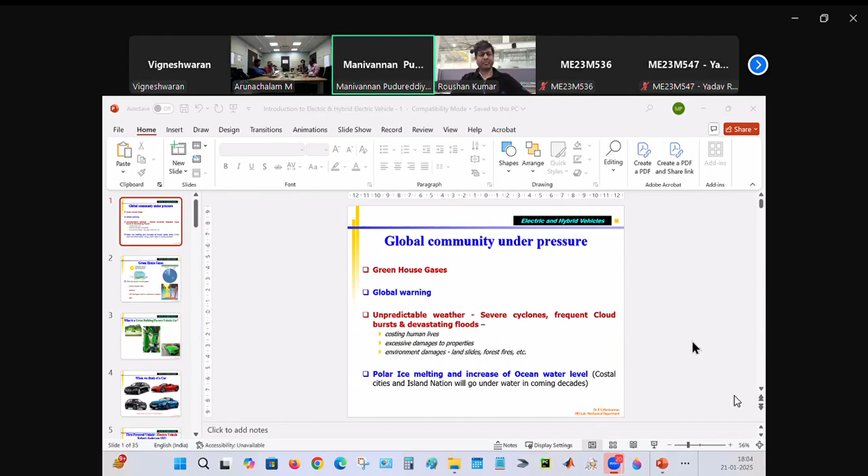I think you can see this is what we started yesterday, just 2 slides only. We are talking generally about what is the issue with global warming, greenhouse gases, which we discussed yesterday.

So already I told you that greenhouse gas is a major issue, which is actually destroying the Earth's atmosphere, which in turn, if you don't control greenhouse gas emissions, the average temperature may increase, summer will become hot, all those things.

Because of that, people, animals, plants can go extinct once for all. That can happen, like dinosaurs, all those things happened. Same thing can happen, but this is a slow process.

We know that dinosaur extinction is only argument or partial proof. Some meteorite, a big one, came and hit the earth near Mexico in the Atlantic Ocean, and it created so much dust that it covered the entire Earth's atmosphere so that sunlight could not reach the Earth's surface.

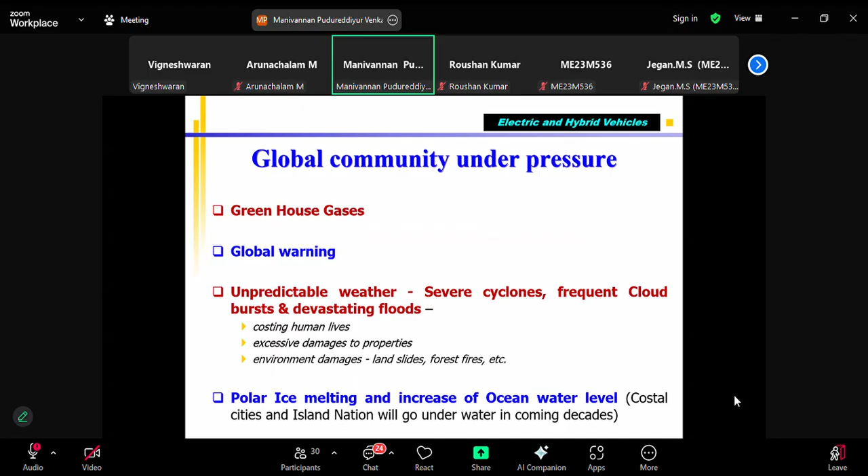They say one of the reasons for dinosaur extinction 65 million years ago is from an asteroid hitting, right? A big asteroid measuring a few kilometers in size. Like that, the Ice Age came and did like that. And they say now humans are creating their own destruction. That is why so many meetings and new technologies are coming.

Okay, now yesterday I explained about greenhouse gas. I know that primarily our interest is reducing the carbon dioxide production or emission from the tailpipe, which was supposed to be an inert gas, right? It was called an inert gas.

So that's why, as I told you many times, we drink soda, which is water plus some minerals, some sweetener, plus carbon dioxide gas. It helps you feel good, helps in digestion, correct? We drink soda many times, but that gas may be inert, but it is a greenhouse gas, which is slowly increasing average temperature. That should be avoided.

Apart from other gases, I know that fridges, AC, all those things have CFC gases, which is already banned. Alternate gases are used in the refrigerants, all those things.

Of course, NOx production is also coming from the engines, combustion of hydrocarbon fuel. But please know the fuel doesn't contain nitrogen. But if combustion temperature becomes above 1000 degrees and the oxygen in the air, which is inside the combustion along with the nitrogen inert gas, they can combine, correct?

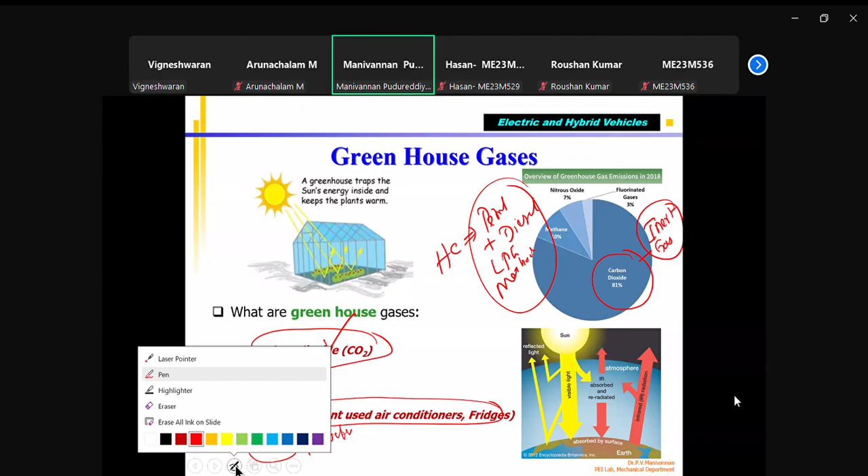Scientists came to know that carbon dioxide is a greenhouse gas only 30-40 years before. Before that, for the last 100 years, throughout the world, whether in education universities like IIT, MIT, Stanford, Japan, the IC engine lab's main job was to improve combustion efficiency first, then reduce toxic gases like NOx, CO, and HC from diesel or petrol engines using catalytic converters or adjusting timing, so perfect combustion happens.

If perfect combustion happens, these three toxic gases and particulate matter can be reduced. Research has gone on for at least 80 years, but only some 30 to 40 years before, scientists and automobile company researchers found that CO2 is a greenhouse gas and global warming started. That means you need to reduce the production of carbon dioxide. But we know that if I do combustion of petrol or diesel, HC plus O2 automatically gives CO2 plus H2O - this is perfect combustion. Even with perfect combustion, CO, HC, NOx is reduced, including PM in diesel and petrol.

This is reduced by using catalytic converter, SCR, all those things. But CO2 cannot be reduced this way, because you are supplying some mass of fuel with some mass of oxygen from the air. So automatically an equivalent amount of CO2 and H2O will come, because input mass equals output mass, except some fraction converted to energy or power. So that means whatever you do...

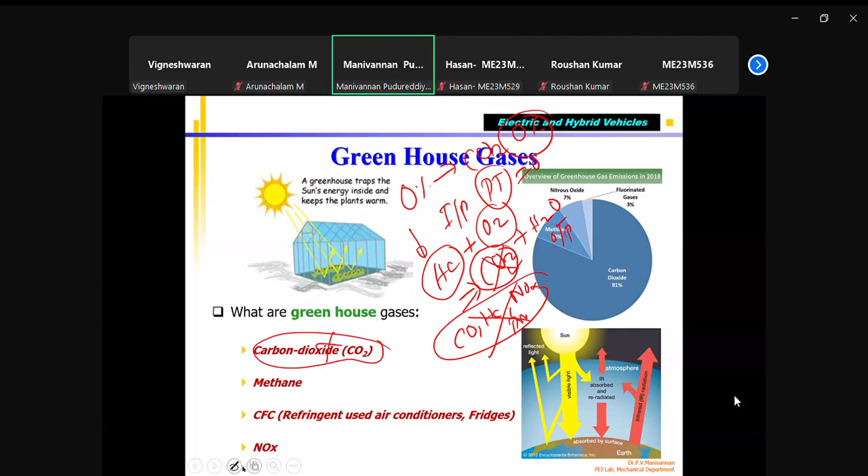So in an IC engine, it is impossible to stop using fuel - without fuel, the engine won't work. Suddenly, as I told you yesterday, without IC engines you cannot do anything, whether in industry, transportation, airplanes, ships - wherever you are doing combustion, engines are there, whether diesel, petrol, LPG based engines, gas fuel, or jet engines - you are going to burn hydrocarbon fuel.

So the only way to reduce the amount of CO2 produced, if you still want to use the IC engine, is making the engine more efficient. With less fuel burned, less CO2 will come, but you still get sufficient torque and power so your vehicle can transport goods and passengers. So for the last 30 years, the main group of engineer researchers and automobile companies are working on increasing the efficiency of the IC engine or jet engine. We know that without that there's no possibility of doing any work. So they're doing research, trying to improve the thermal efficiency.

Thermal efficiency has a limitation. Based on thermodynamic law, only a certain percent of fuel burned gets converted into mechanical energy. If I burn some amount of fuel and get 100 joules of heat energy, the entire energy cannot be converted into mechanical torque, power, or vehicle speed. So that thermal efficiency - around 40% theoretical efficiency for the Otto cycle, diesel cycle, whatever cycle - finally there's a limit.

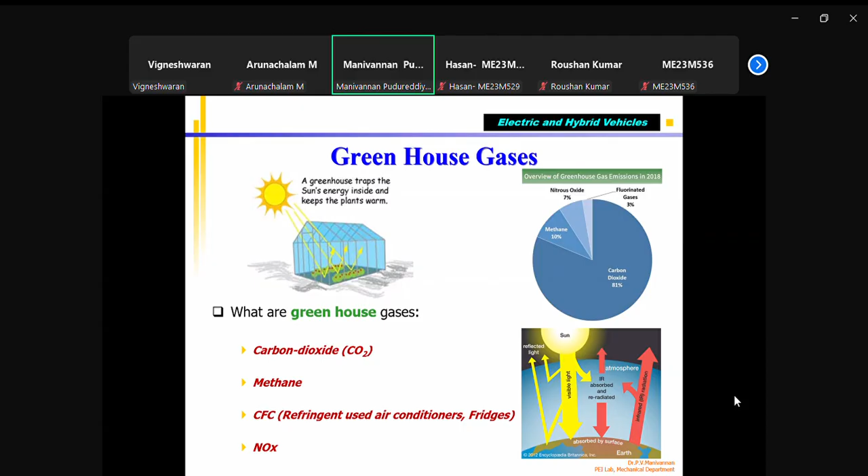But in case of electric motor, the input energy is electrical power. I give so many volts, so much current flows, power equals V into I. If you integrate the power consumed by the electric motor over time, you get energy. So if I give say 100 watts of electrical energy, you can get close to 90% of the mechanical energy. In an electric motor, the energy conversion is close to 90% because there is no heat loss, the machine is working by electromagnetic induction. Torque is produced by electromagnetism. So present generation motors, brushless DC motors and all, are giving up to 95% efficiency.

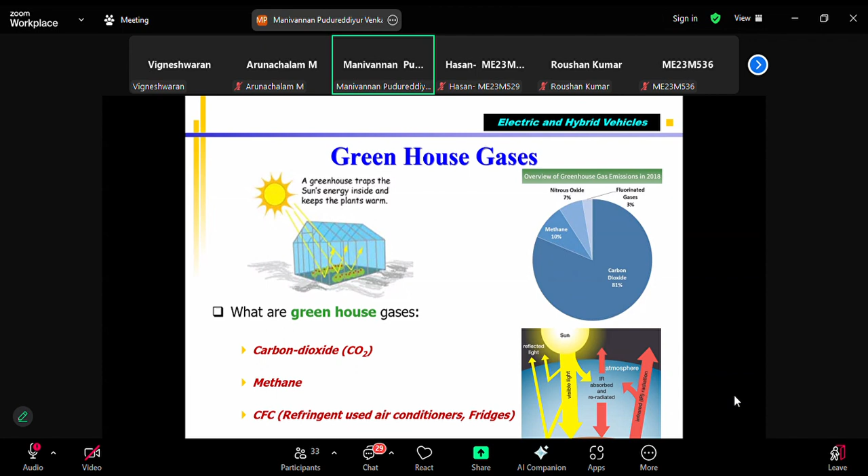So if you can go for using electric motor to generate mechanical torque, power, or energy to do any task, whether to drive your motorcycle, car, truck, bus, ship, or aeroplane, jet - instead of jet engine, use electric motor for driving propellers, whatever it may be - then the efficiency is very high. And apart from that, CO2 is zero because you are using electrical energy. Input is current and voltage.

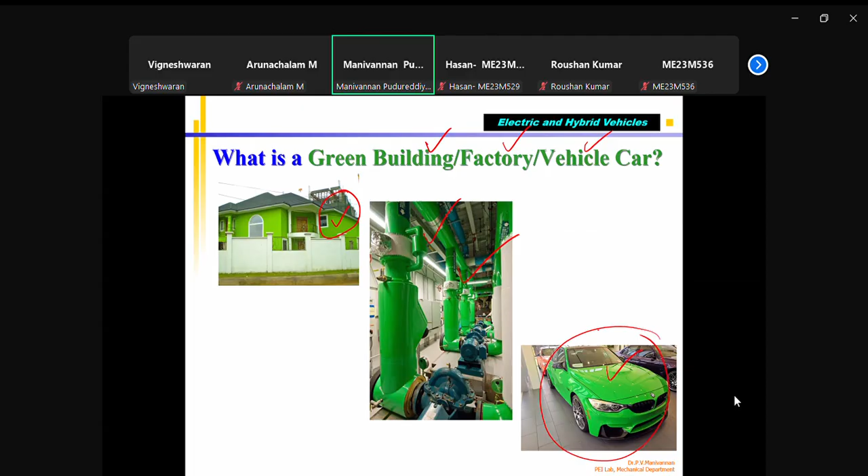Generally when we talk about automobiles, our interest today - the whole lecture, the whole program - is MTech in automobile technology, and the course is about hybrid vehicles only. We are not talking about factories, houses, green buildings, or green factories. Our interest is talking about green cars. But a green car cannot be achieved overnight, that's why we have different steps.

So these cars cannot be considered green cars. If you drive this car with maximum fuel efficiency, even if it gives 100 kilometers per liter, you are still burning 1 liter of petrol or diesel, and you automatically produce CO2. You are adding it into the atmosphere, so the atmospheric temperature increases - this is global warming, the greenhouse effect, and all those things. So you cannot avoid it.

These petrol cars are only around 120 years old. All petrol and diesel cars came after the invention of the petrol engine by Otto and the diesel engine by Rudolf Diesel - before that there were no IC engines. All cars are powered by this only. Jet engines are generally not used for buses, trucks, or cars, so we are not going to talk about that. We are talking about internal combustion IC engines only.

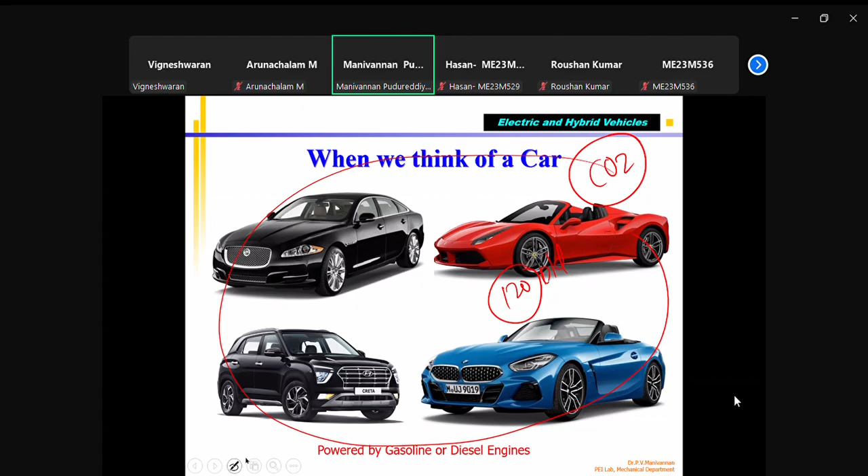So these cars, even now, majority, at least 90% of the automobiles are IC engine based. As on today, at least 5 to 10% we are trying to get hybrid, electric, all those things. But we need to convert the remaining 90% also into pure electric, so that the carbon dioxide production from IC engines is removed from vehicles. Then CO2 production is stopped, greenhouse gas is reduced, and we can protect our environment. But you cannot do it overnight.

We need vehicles for transporting people, transporting goods. Without that, society cannot live. But as I told you, the engine was invented only 120 or 100 years before. Before that, for thousands of years, people were transporting goods or people from one location to another using animals like bulls, horses, donkeys, mules. That was the primary transportation some 5,000 years before.

After that, they invented chariots and also bullock carts, driven by bulls or cows or other animals, and horse-driven carts. Chariots were used for transporting people in a faster way, and also for military purposes. So chariots were part of the military, like horses, chariots, elephants, and foot soldiers.

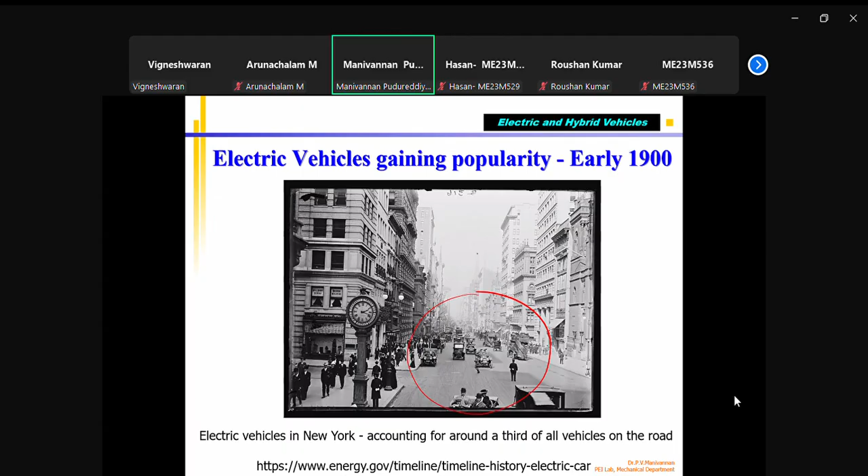Then the hybrid car came. Now we talk about hybrid cars as if it's a new innovation, but please understand all these things were tried long before, 100 years, 50 to 70 years before. Porsche, one of the leading sports car manufacturers in Europe, developed a hybrid car which has an electric motor with an engine. Then the Ford T model. All these things were happening in the 1900s, 1920s, 1950s.

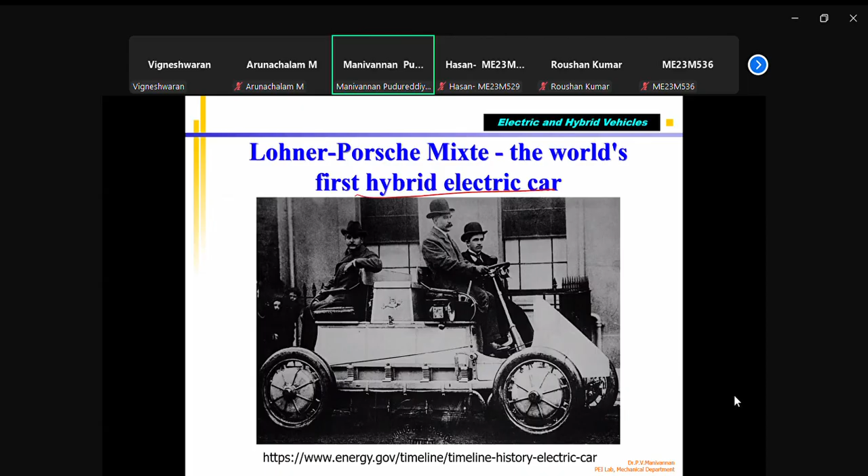But the invention of the petrol and diesel engine, and also extracting crude oil from below the earth, maybe 1 or 2 kilometers down, drilling and getting the crude oil, and then extracting diesel and petrol from it, was very tedious. That time technology was not available, and people did not know crude oil was there below the earth's surface.

They first discovered crude oil, if I am correct, in Pennsylvania, USA, around 150 to 200 years before. It was oozing out like in a desert or forest, a thick black color oil. People thought something strange, then found it was combustible. Crude oil is combustible. Then, of course, Iraq also found crude oil around 150 years ago, since Iraq was under British rule like India.

From that, they developed cracking technology. The petrochemical industry came slowly, along with the production of diesel and drilling, and they found many places in the Middle East, in the US, Russia, and many places in India too, like Assam, we are finding now. So the production of petrol and crude oil, and getting petrol and diesel from it, all came from this.

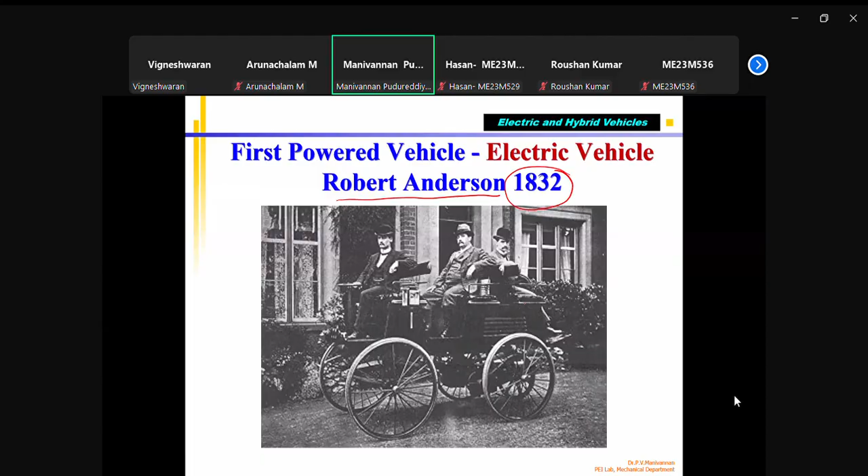So the engine was also invented. The electric vehicle, which started in 1832, became petrol engine based, like the Model T. I'm telling you there were more than 20, 30 companies. Europe had Mercedes-Benz, Citroen — these companies are 100 years old — Fiat, all these companies started in Europe.

Similarly in the US, Ford started the very famous Model T. It was a gasoline engine, very popular from 1908 to 1912. Of course, even now, if you have one, you can sell it for a huge amount — a working car. So this is what I call the penetration of the IC engine inside the automobile.

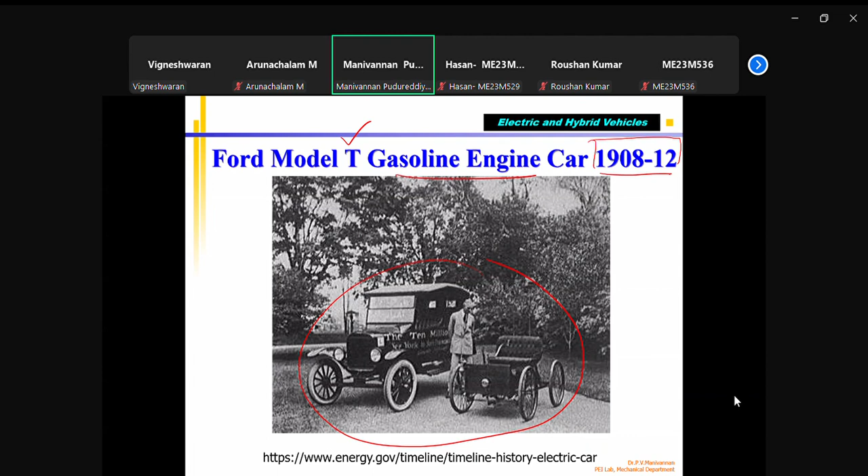The original automobile was an electric vehicle that became IC engine based. Of course, here I'm talking about the 1900s, and then 1970 or 1971, NASA — we know that Apollo went on the Apollo missions.

Neil Armstrong, along with one more astronaut, landed on the moon. They walked on it, correct? But first, the Apollo missions started, I think, from 1 to 17. Apollo 1, 2, 3, 4, like that came. In between, something happened. Apollo 11 was the first one to land on the moon, with Armstrong. Apollo 17 was the last one, if I'm correct. Within 1969, I think, in July, Armstrong landed.

Then subsequently, over another 2 years, 7 more missions went up to Apollo 17. One mission failed, if I'm correct, Apollo 13. They went near the moon but could not land. There was a big accident, but they safely returned. That was Apollo 13. But otherwise, each time there were 2 people.

In one mission, they took a lunar rover because they wanted to travel, since you cannot walk on the moon for long due to limited time. In a short duration, if you want to survey and look for material, you need to move quickly, so you need a vehicle. The first lunar rover was developed by NASA. It landed along with the astronauts, and you can see there are 2 seats. They sat and traveled around 22 kilometers.

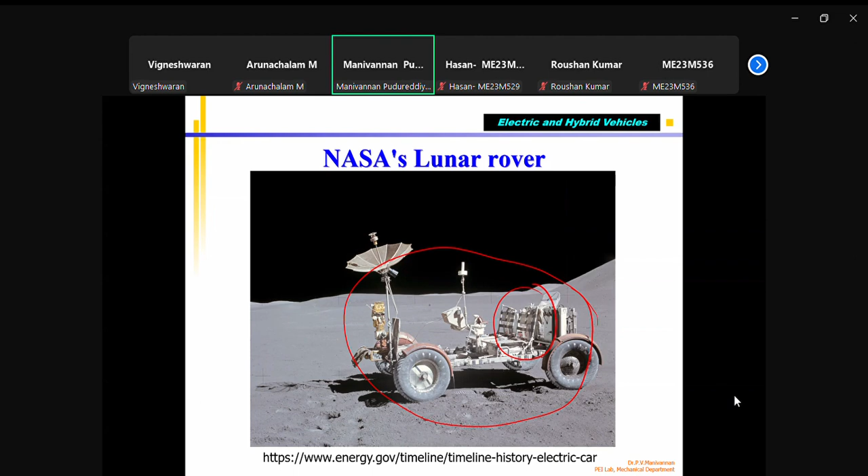Of course, automobile companies also did not keep quiet. General Motors, GM, produced an electric car in 1973. You can see this car, a small car, operated with a lead acid battery. This is charging, you can see, but they had very limited range, using lead acid battery. That was the battery available; lithium ion battery was not available in the 1970s. Lithium ion came only some 20 years ago. Even the concept existed, but it was not commercially available.

It had limited performance, and we will talk about that tomorrow, the limitations of electric vehicles. The range: the battery could travel the vehicle some 20-30 kilometers after starting, then the battery discharges, and you have to charge the lead acid battery for 10 hours. So you would travel another 20-30 kilometers, then stop. The weight to power density of the battery was very bad, something like 10%, 12%. Because of all these things, GM said electric vehicles would not come, that it was not feasible compared to IC engine based vehicles. That's what they were talking about.

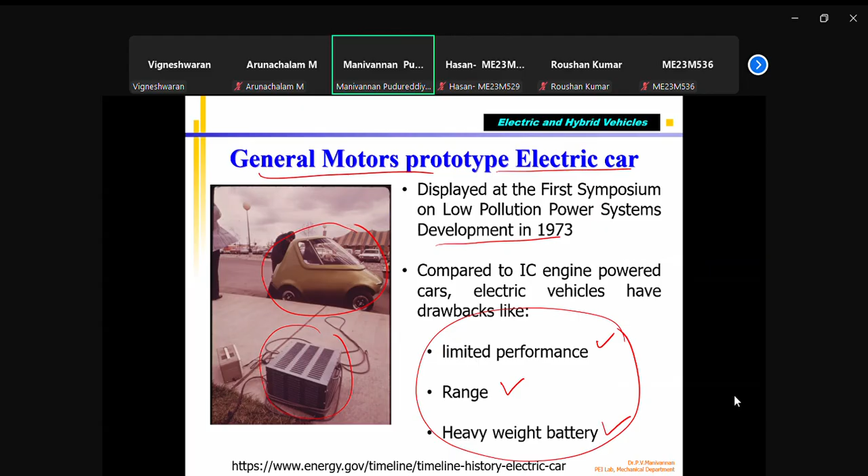So even though GM tried, other companies also tried. I'm giving one example, General Motors in 1973, they tried like that. Other companies tried, then they abandoned it. But that's not our interest. Since all this happened in the 1970s, one way forward is to improve efficiency. We want to reduce CO2 production, which means you have to improve the efficiency of the engine.

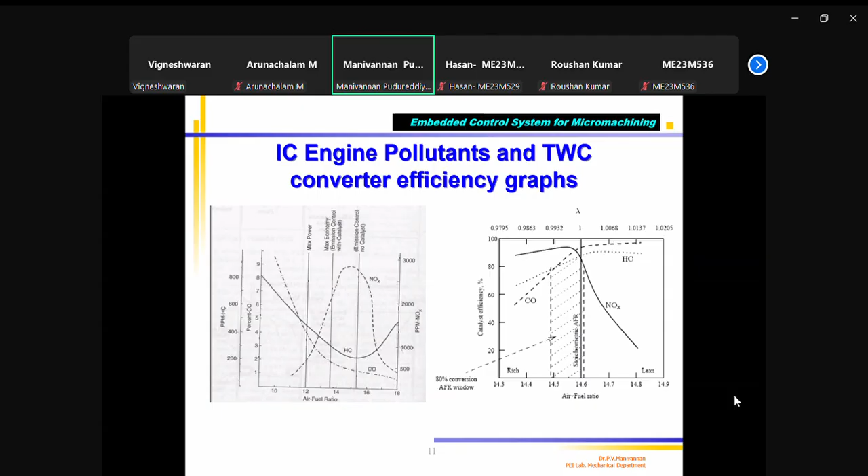Apart from reducing emissions, we already talked about this in the previous class, when I discussed IC engines for the introduction to autonomous vehicles. But just to quickly go through it, we try to develop new technologies to reduce fuel consumption. Reducing fuel consumption means the amount of CO2 produced is also reduced. So lesser the fuel, lesser the CO2.

But you want to get maximum torque and maximum power. We know that in a petrol engine, the torque produced by the engine is directly proportional to the air-fuel ratio and spark timing. The best thermal efficiency is obtained in a petrol engine when the air-fuel ratio is around stoichiometric, slightly leaner, not exactly at one, around one by 15 or so, where thermal efficiency is maximum.

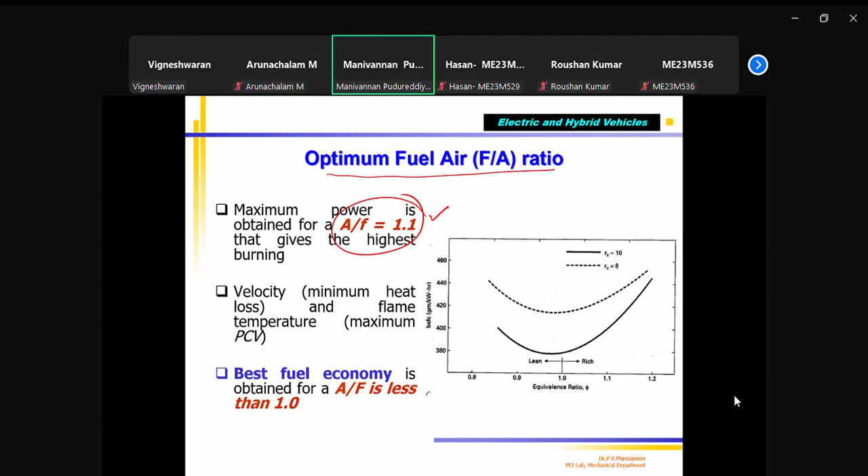This graph shows that. The next thing is, if you talk about an SI engine or petrol engine, the torque T is proportional to AFR and spark timing. Spark timing refers to when you give the start of combustion, or when you give the spark, measured from TDC as advance or retard. Depending on engine speed, you change when the spark is given.

10 degree before TDC, 20 degree, 30 degree, or 35 degree, you will vary. So that means as a control engineer, the SI engine's torque, speed and power can be controlled by varying the air-fuel ratio and the spark timing. These two, if you vary, the indicated mean effective pressure, or final shaft power, can be controlled. So this is one thing.

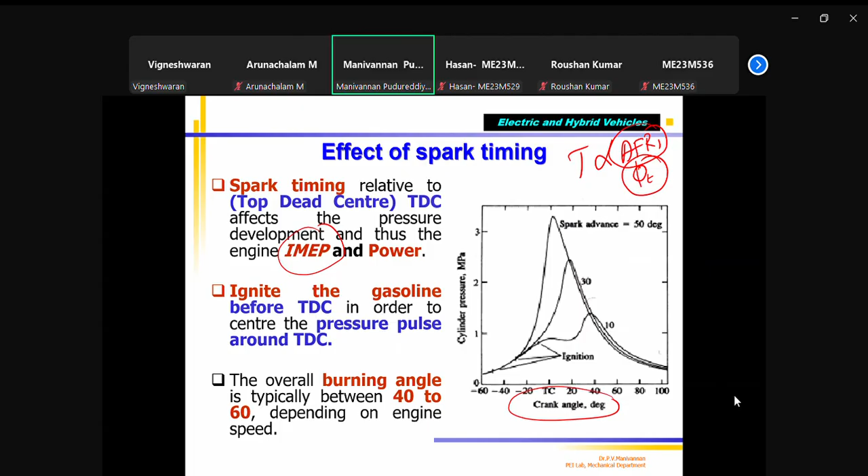So all the research now going on in IC engine labs, universities, and industry is trying to play with these two parameters, air-fuel ratio and spark timing, to ensure the engine produces maximum torque with minimal fuel, so that CO2 emission reduces, apart from reducing CO, HC and NOx. And again, maximum brake thermal efficiency or maximum brake torque also happens only at a particular spark timing in a petrol engine.

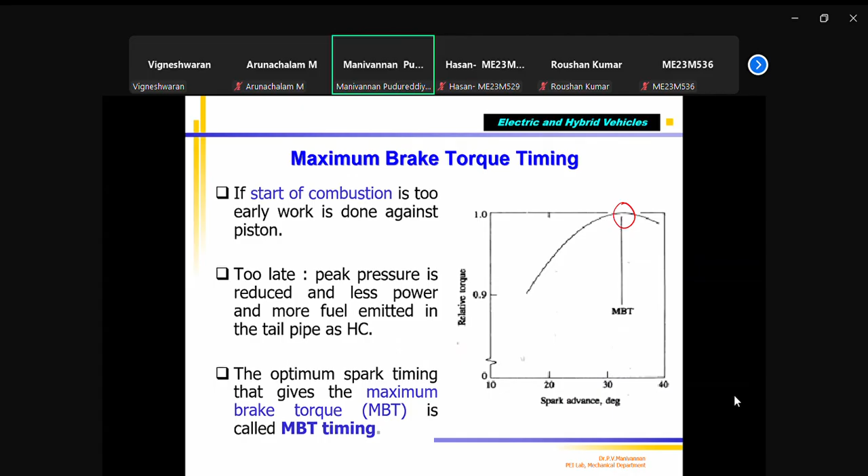So again, this will be electronically controlled - electronic spark timing control, electronic air-fuel ratio control. People have developed different types of fuel injection systems, advanced fuel injection systems. We already know it is better than the carburetor for fuel metering. A carburetor cannot achieve the level of fuel control needed for proper combustion, so CO, HC, NOx and thermal efficiency are all affected. That is possible only with a fuel injection system.

For perfect combustion, the liquid fuel should evaporate and become a gas before or during combustion, so all fuel will be burned. If all fuel is burned, I get maximum torque, and wastage of fuel is reduced, so CO2 emission is reduced.

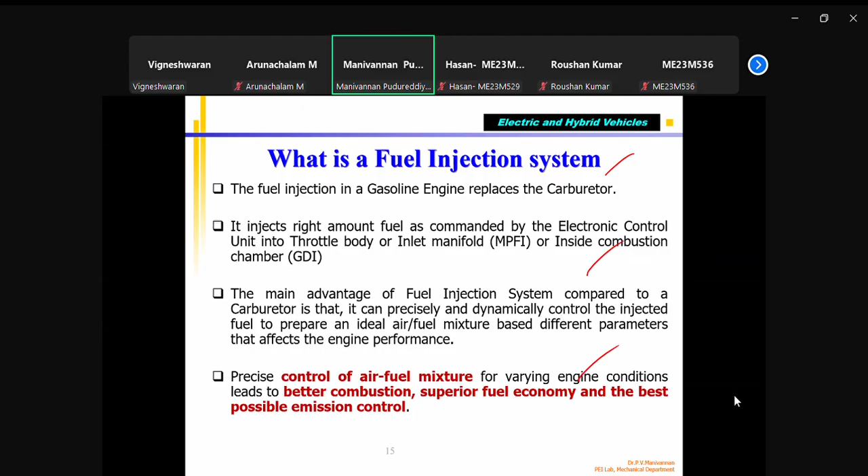So different fuel injection techniques were used in diesel engines and also petrol engines. We know that spraying fuel improves fuel vaporization. If fuel vaporizes, homogeneous air-fuel ratio happens inside the combustion chamber, so the fuel vapor easily mixes with air and gets oxygen molecules close to it. So all the fuel molecules get converted into CO2 and H2O, giving maximum heat, maximum pressure, and maximum thermal efficiency. Vaporization is very important, and that is achieved by using fuel injection instead of carburetor.

Spraying also makes cold start easier. All these things are much better in fuel injection compared to carburetor. Otherwise, you have to put the choke. We know that with motorcycles...

Anytime I had a motorcycle, I drove it for 20-25 years. In winter at IIT, in the early morning December temperature would be 18-20 degrees. I had to go and kick-start my motorcycle because there was no starting motor - 10 times, 20 times, sometimes my leg would pain. I'd put the choke, still it wouldn't start. Sometimes because it's very cold. In Chennai itself it's bad, think about going to Kashmir, North India, cold countries, European countries, US, Japan.

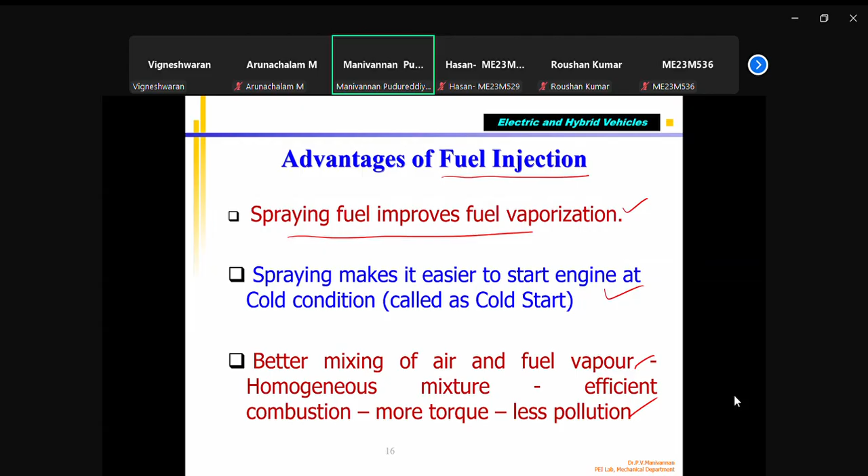It is very difficult in cold weather. So the fuel injection system can automatically adjust the air-fuel ratio without a choke - they call it electronic choke, injecting more fuel. So fuel injection can help in cold start. Better mixing happens because the fuel is already vaporized due to the small droplet size.

So fuel injection did not come overnight - there were 3 stages. Currently we are going to GDI engines, the latest one. First it started with throttle body injection - that means in a multi-cylinder engine, only one injector will be there in the plenum, at the main throttle body. It will inject all the fuel. For example, in a 4-cylinder engine, it will inject the fuel necessary for all 4 cylinders at one location.

When air moves, the air is sucked in and the vapor will mix with it and go to individual cylinders. But the main problem with throttle body, a single point injection in a multi-cylinder engine, is maldistribution of air-fuel ratio.

For example, I have 4 cylinders arranged like this. Piston is going, I inject the fuel at the central body, air is coming in. When I inject, the fuel vapor is here - you can see this area will be rich. So when air enters and the piston goes down, this cylinder will get less fuel vapor and more air. But for the next cylinder, more fuel will come because the fuel vapor is very close. So these 2 cylinders will get more fuel vapor compared to the other 2 cylinders. This is called central body or throttle body injection, which came about 50 years ago. They call this maldistribution of the air-fuel ratio.

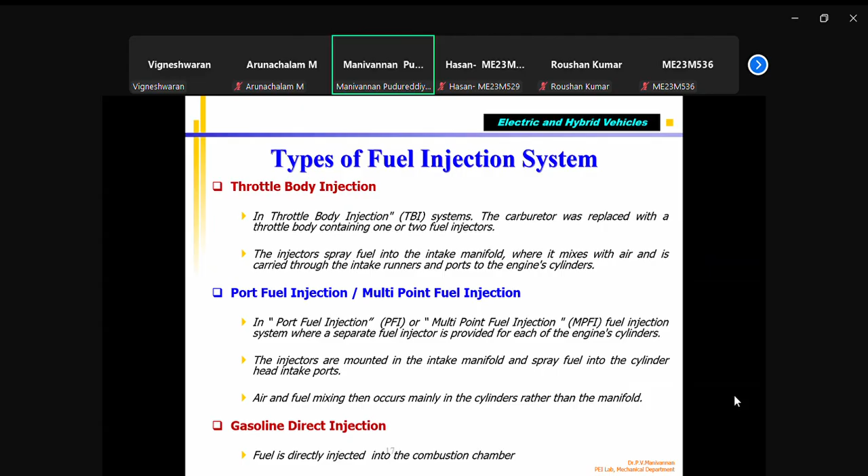These are the advantages of fuel injection systems compared to carburetors. We already discussed this in the previous course, but the whole idea with electric and hybrid vehicles is reducing fuel consumption as much as possible - but we cannot make it zero. If there's no fuel, the engine will not work. Right now, in one step, you cannot go to electric vehicles - there are limitations which we will see in the next class.

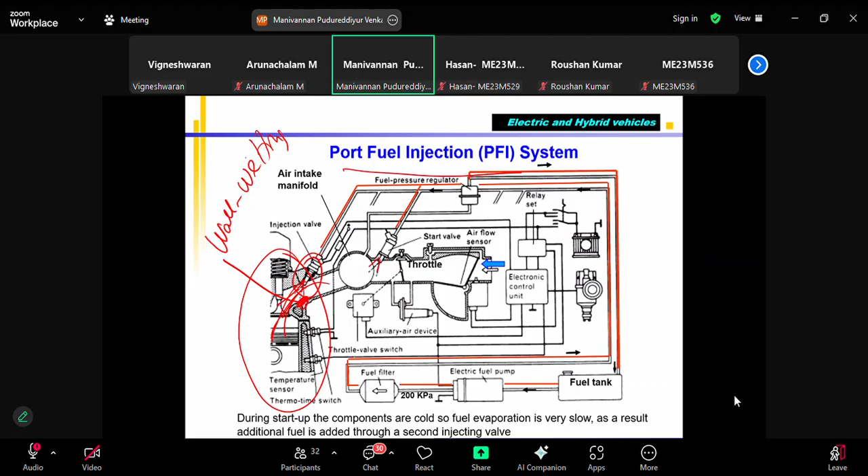So we know that in port fuel injection with a single cylinder, like a motorcycle, there's only one injector. I'm injecting fuel, so some amount of fuel sticks - that is called wall wetting. It is a liquid fuel, it sticks. The majority of fuel goes inside the combustion chamber along with the air, but some remains, so that fuel is wasted. Because the air-fuel ratio is not maintained, CO and HC emissions happen.

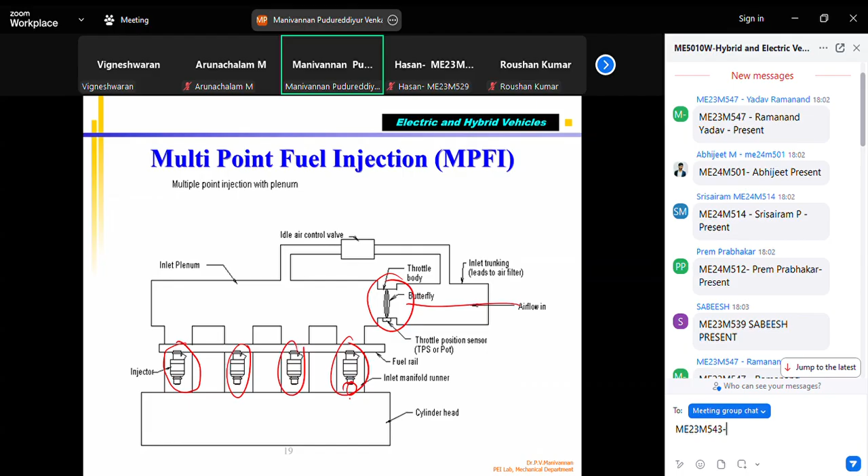With multi-point injection, each cylinder has its own injector - one, second, third, fourth cylinder in a 4-cylinder engine. Air is controlled by the butterfly valve, fuel is controlled and injected directly. This is the advantage compared to single point injection in a multi-cylinder engine - maldistribution is removed.

Next is gasoline direct injection, GDI. The advantage is fuel is directly injected inside the combustion chamber, which generally needs high pressure - 5 to 10 MPa, or 15 MPa injection pressure, sometimes even higher. Different companies use different pressures in GDI fuel injection - don't assume it's always 5 or 10; some companies use 15, 18, or 20. It varies, but the advantage is direct fuel injection.

Then there's the top of the piston, called the bowl of the piston - its shape is also very important for gasoline injection direction. The fuel and air should go and create a tornado-like cyclone effect. The air should circulate so the injected fuel evaporates and mixes uniformly inside the GDI engine.

And it works on both stratified as well as homogeneous modes, correct? Stratified, all these things at different times. Did somebody talk about this in IC engine class, or GDI engine class? Yes sir, yes sir, yes sir. Anand sir, when we... yeah that's right, so you would have talked about it.

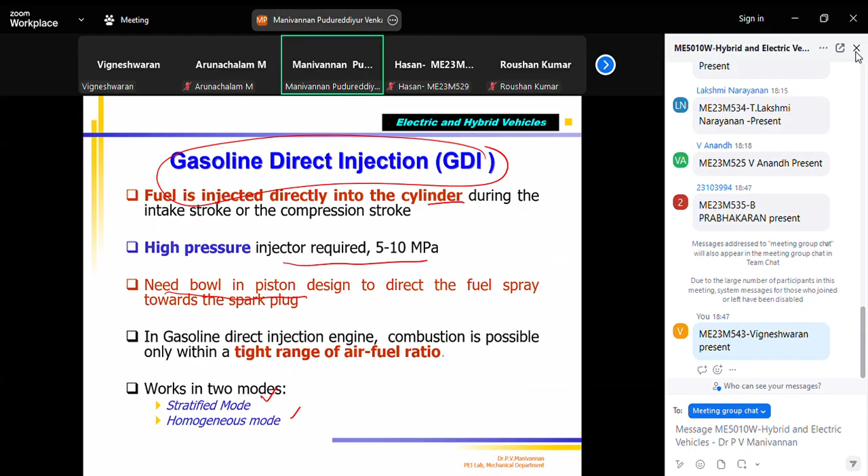So it works in homogeneous and stratified modes, all to improve engine efficiency so that fuel use can be reduced while getting the same mileage, same torque, same power - so CO2 production is reduced. This is what I told you: stratified mode means the injector itself changes its spray pattern in the GDI engine. If I want to run the engine in stratified mode, the injector will spray fuel such that it goes - you can see this is the bowl, right?

Bowl shape, it is not a flat surface. You can see that the air comes in - this is the air inlet. Air inlet comes and hits, air will circulate inside. There is a swirling action created by the shape of the inlet port, the plenum, and also the bowl shape.

Now fuel is injected. Injected fuel will go near the spark plug because you are in stratified mode, injecting less fuel. That fuel should vaporize and go near the spark plug. When your spark is given, it should ignite. If the air fuel ratio is very lean near the spark plug, even if you give a spark, misfire will happen, combustion will not start. So in stratified mode, it's very important that the small quantity of injected fuel is directed by the air to go near the spark plug. Then you give the spark, so they are stratified.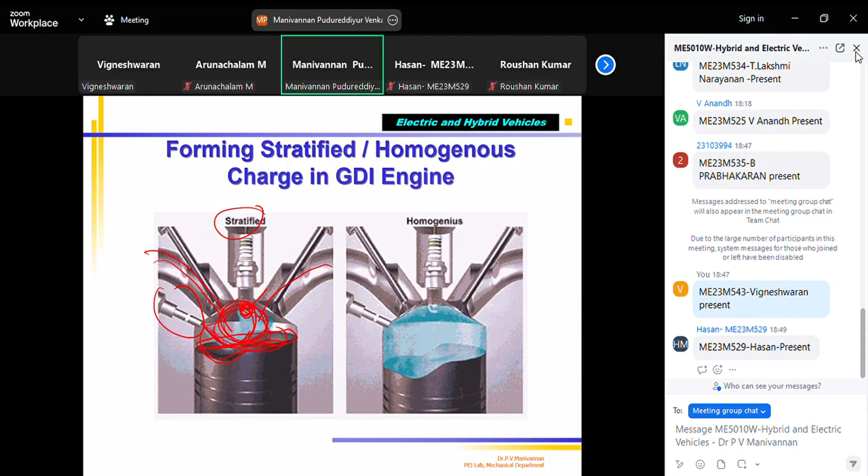Advantage is you can inject less fuel, operate in lean mode, and get more mileage in stratified mode. The fuel is injected, but once combustion starts, it mixes automatically - maybe 24:1, 22:1 ratio - you can run your petrol engine and get maximum mileage. But you will not get power in stratified mode. You want more mileage, no acceleration, moderate acceleration. But if you want more pickup, go homogeneous.

You inject the fuel - see this spray pattern, it is very small for stratified mode, and it injects like this, deflected by the piston top shape, and the air also comes in and mixes. Here, you inject a wider spray, and air coming in mixes it homogeneously, giving more power and acceleration. You run homogeneous mixture for power, and stratified mode for light load or more mileage.

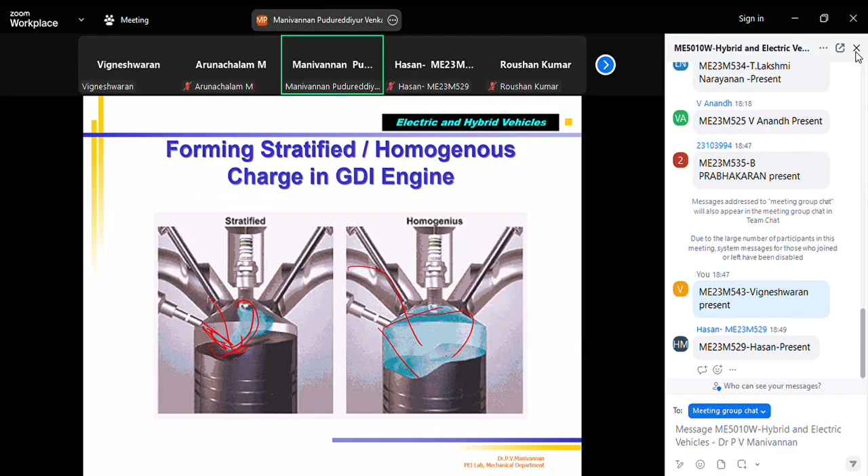So these are done to get the maximum engine efficiency. So CO2 is produced - again, I will repeat, my whole idea is getting rid of CO2. How? By different technology. That's why I'm talking about this.

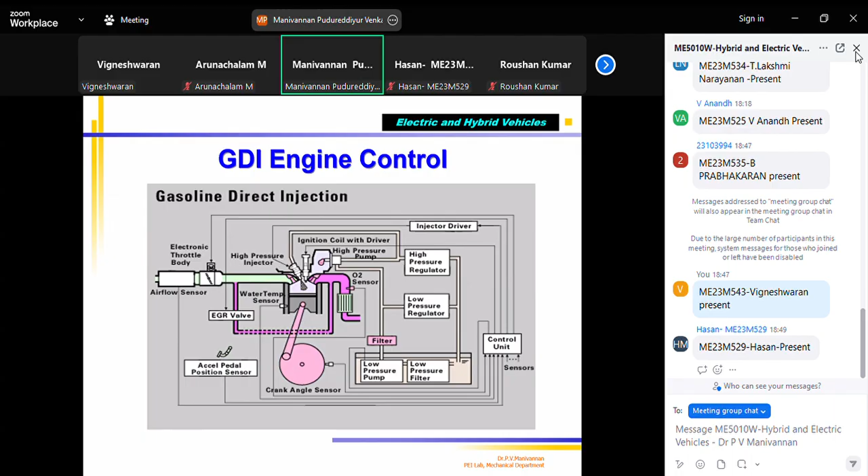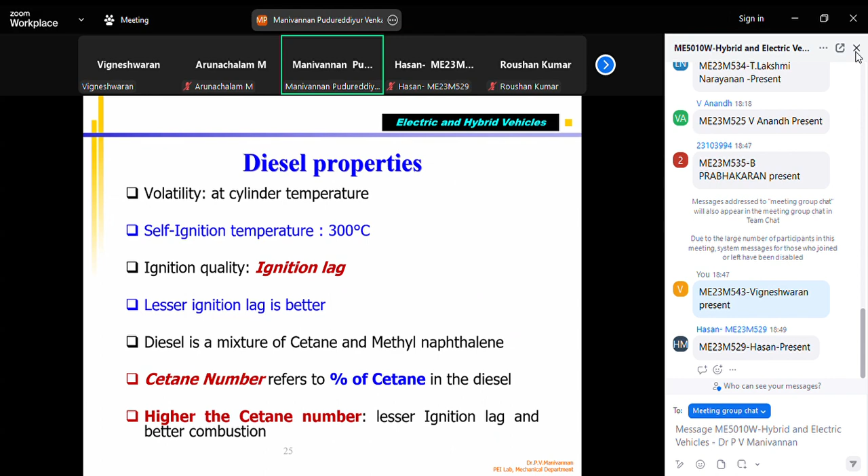Diesel engine, you already know about it. In the diesel engine also, NOx is produced, particulate matter is produced, and some amount of fuel comes as partially burned. To improve it, like MPFI or GDI, they developed CRDI, Common Rail Direct Injection system, which you know about.

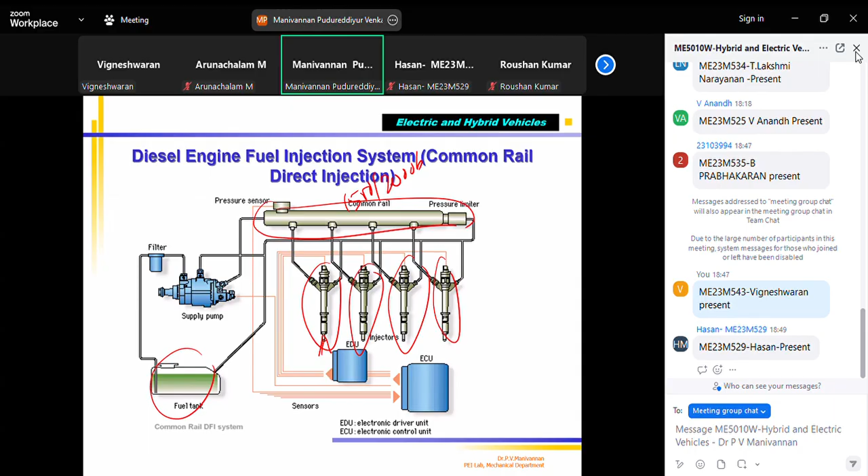The fuel is pressurized to about 500 bar to 2000 bar and stored in a common rail. There's an ECU that will open the injector for each cylinder - 4 cylinders, 4 cylinder diesel injectors, high pressure diesel. They inject the fuel at high pressure, so the droplet size becomes very small, maybe 50 micrometer to 20 micrometer, which easily evaporates and combustion noise reduces. The main advantage of diesel injection is the combustion rate is controlled by the injector.

Note down these points. Combustion rate is controlled by injection rate - like injection rate, spray angle, injection pressure, nozzle size, shape of the spray. All these things decide the combustion rate or combustion curve, how the rate of combustion happens, along with the chamber shape and mixture motion, turbulence, like I told you. That is how you design the piston top shape, what we call the crown. Then torque output is controlled by the amount of fuel injected.

Then the main problem is atomization - the smaller the droplets, it can easily evaporate and burn easily, producing less particulate matter, and you get more torque.

Combustion temperature should be controlled to reduce NOx emission. We know that if temperature goes beyond 1000 degrees centigrade, NOx is produced. So whether petrol or diesel engine, you have to control combustion temperature. But in diesel engines it is predominant - compared to petrol engines, NOx emission is very high in diesel engines because diesel combustion produces more heat than petrol combustion, so that needs to be controlled.

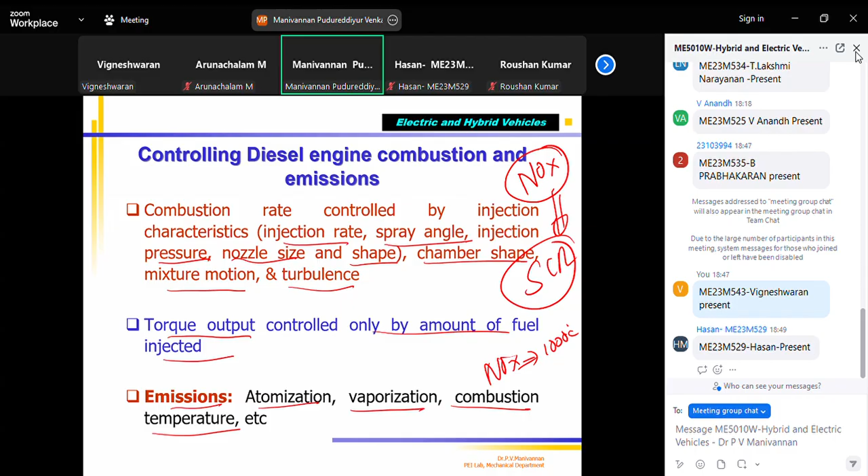Of course, if NOx comes, what do you do? You use SCR - instead of a TW converter, you use SCR with urea injection at the exhaust pipe in quantity, so that the nitric oxide is converted back into nitrogen. That's what you do, with an ECU controlling multiple injections and all these things.

The last one in the engine is called Homogeneous Charge Compression Ignition, HCCI combustion. We know the petrol engine is spark ignition - air fuel comes in, you give a spark, combustion happens, and the piston is pushed down. In the compression ignition engine, diesel engine, air is sucked in, diesel is sprayed inside, combustion happens, and it pushes the piston down.

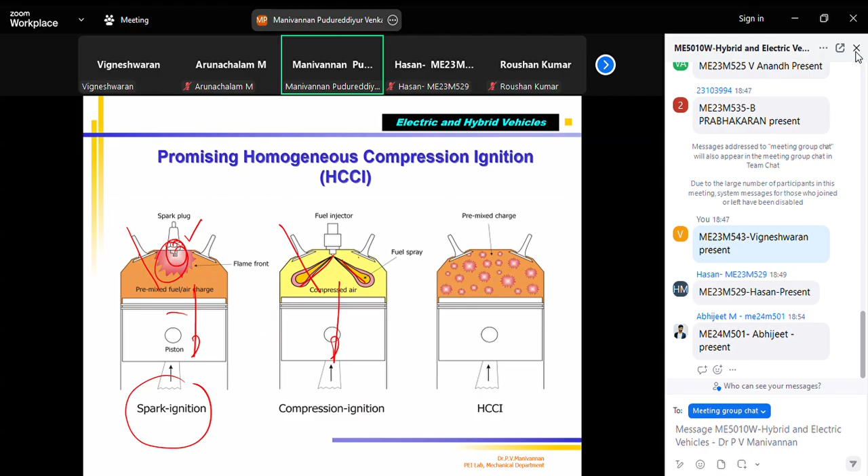So here you need a spark plug, you don't need a spark plug here. In case of HCCI engine, it will work similar to petrol engine as well as diesel engine. They call it cold combustion. I think the professor would have explained this already, so I'm not going to explain it again.

The main advantage of HCCI engine is NOx emission is less. They call it cold combustion. Please note, cold combustion doesn't mean zero degree or minus degree temperature. See, here the average combustion chamber temperature may be around 800 degrees, while this one may be around 400 or 450 degrees, lesser.

I told you combustion can go to 800 to 1200 degrees in diesel engine combustion. Here also it can go 800 to 1000 degrees. That's why NOx emission is produced. But in cold combustion, even though fuel is burning, the temperature is much lesser than diesel engine or petrol engine.

So the NOx emission is less, and the combustion happens throughout the entire cylinder because you are pumping a pre-mixed fuel-air mixture. I mix fuel and air outside and heat it, and the heated fuel-air mixture is sent inside the combustion chamber. Instead of sending regular air in HCCI engine, air is sucked in, fuel is mixed, and together they are heated from normal temperature to a higher temperature, then sent inside the combustion chamber during the inlet suction stroke.

After that it is compressed, and because the fuel-air mixture is already at higher temperature, the compression temperature increases further, so it's already distributed and combustion happens at multiple points. They call this cold combustion, so the average temperature is much less, and NOx is very low in case of HCCI engine.

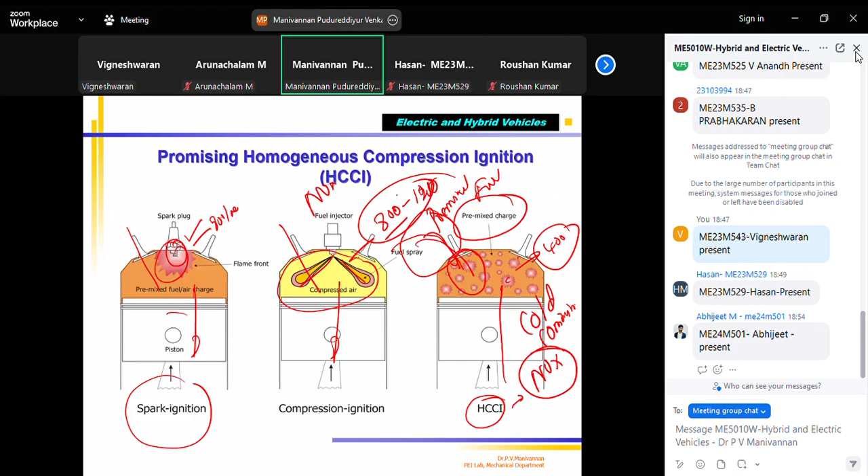No spark plug, it's like a diesel engine, but you are mixing fuel like a petrol engine - these are the advantages. If it is stoichiometric air fuel ratio charge condition, there's low part load efficiency - that's the major drawback. Low emission with three-way catalytic converter, because the catalytic converter can handle this.

In lean mode, if you run the same HCCI engine lean mode like an SI engine, you get reduced pumping work and improved part load efficiency. But work output is reduced, so it's efficient in part load condition, but HC and NOx increase.

If you run the HCCI engine in stratified mode like a GDI engine, please see it's not different - the same engine can operate in different modes. That is the advantage of the HCCI engine.

So it becomes very complex to develop the control system for HCCI engine. GDI itself is very difficult because you have to change the injector - you need a special injector, not a regular injector. The spray pattern should be varied, so a special injector is needed for stratified mode or homogeneous mode. So apart from that, you have to do this.

Stratified mode advantage - but also a large problem with this one. The negative is NOx is produced, particulate matter comes, and pumping work is reduced, so it improves efficiency. In HCCI, these are petrol engine characteristics if I run it in different modes, correct?

So in HCCI engine, everything is achievable except the control is very difficult. You can achieve the advantages of stratified, lean burn, and stoichiometric modes all combined, but the control system is very difficult.